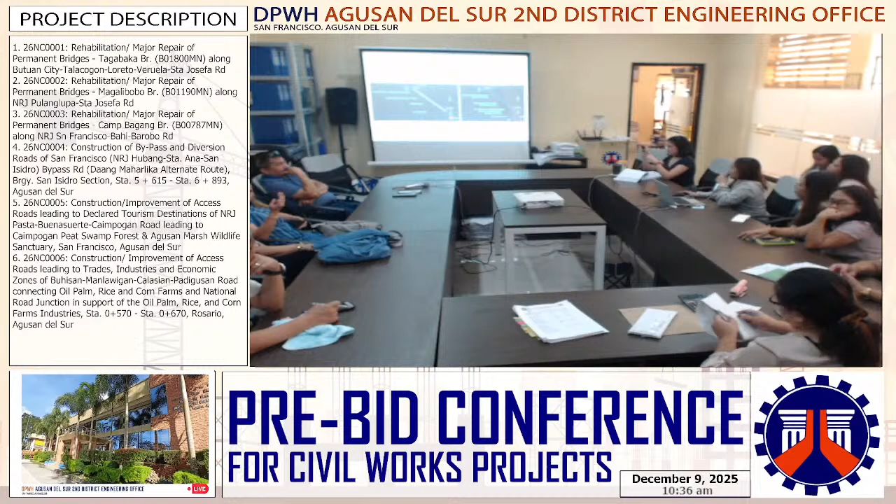So for the bank protection detail, we have here the RC, reinforced concrete, 0.3 meter thick, with lean concrete, 0.10 meter thick with weep holes, and RC footing of 1.8 by 0.5, altitude of 4.5, and for the reinforcing steel bars, 16 mm diameter for the horizontal bars spaced at 0.4, and for vertical bars, 12 mm diameter spaced at 0.4.

And for the RC footing, 10 pieces, 16 mm diameter horizontal bars, and for the stirrups, 12 mm diameter vertical bars spaced at 0.4. Note 50 mm concrete cover. So the dimension of the bank protection is just based on the existing structure on site.

Part of this project is also the installation of transverse expansion joint finger type with quantity of 14.8 linear meters to be installed in between approach slab and deck slab.

So for the program of work, we have here the facilities for the engineers, provision of field office for the engineer, rental basis, bunkhouse 4 months.

For other general requirements, bridge survey and staking 1 lump sum, project billboard 4 each, occupational safety and health 1 lump sum, traffic management based on DEO 13 series of 2018 under layout 3 1 lump sum, mob and demob 1 lump sum.

For the earthwork, we have clearing and grubbing 0.04 hectares, removal of actual structures obstruction 0.3 meter thick PCCP reinforced or the existing approach slabs 80 square meters.

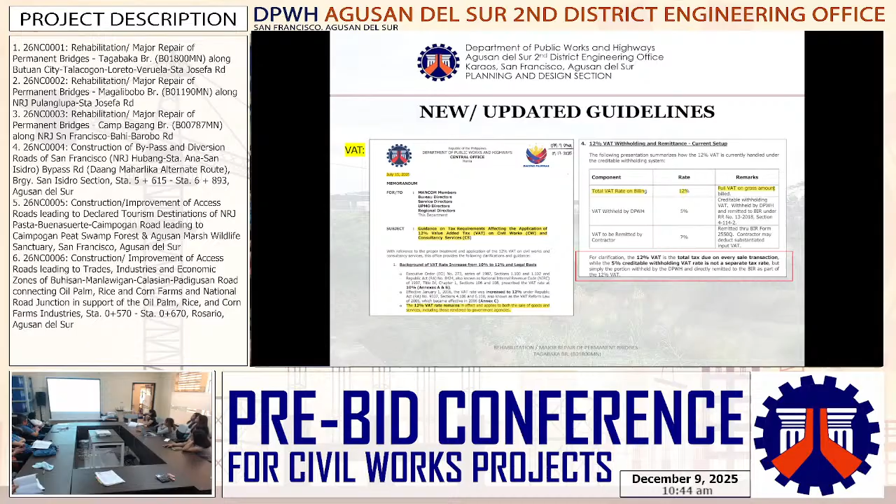Also, for the clarification and the utilization of special issuance of the construction materials price data, or CMPD, through memorandum dated November 24, 2025: first, the prices reflected in the special issuance are exclusive of VAT.

This accords with the Finance Service Memorandum dated July 15, which provides for the proper application of the 12% VAT in the DUPA, the one that I explained a while ago.

Number 2, materials not covered in the special issuance shall be referred to the last approved CMPD, second quarter CY 2025, provided that the VAT is excluded prior to utilization.

So for materials not part of the special issuance, we adopted the prices from the second quarter CY 2025, and we also deducted the 12% VAT to get the original price.

Number 3, specific materials in the CMPD are highlighted in green to indicate the outsource prices, with the corresponding general source locations identified in the footer of each region-wide CMPD.

Meaning for Region 13 again, the asphalt will be from Misamis Oriental, and the RSB and SSB will be from Davao City.

For the updated guidelines on labor, we used the latest labor rates as of June 2025 through memorandum dated July 7, 2025. And also for the updated guidelines on equipment, we use the updated prescribed equipment rental rates through memorandum dated October 13, 2025.

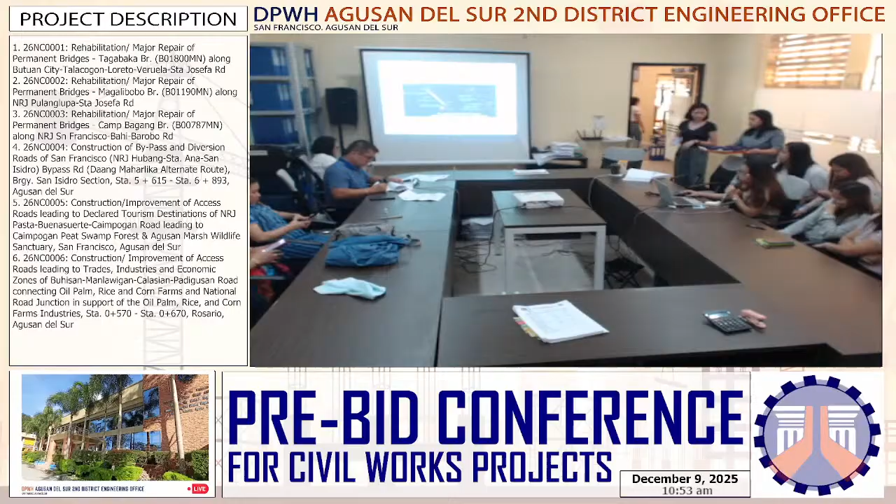The reinforced concrete with dimensions of 0.4 by 1.5 will cover the distance of 22 meters. For the schedule of the bars, we have 12mm diameter vertical bars spaced at 0.4 meters, 16mm diameter horizontal bars spaced at 0.4 meters. For the footing, RC footing, we have 16mm diameter horizontal bars, and for the stirrups, we have 12mm diameter vertical bars spaced at 0.4 meters with 50mm concrete cover.

This only covers the area under the bridge and the downstream side. It covers a total distance of 22 meters. For the reinforced concrete bank protection with pile cap and steel sheet piles, it covers 12 meters.

The pile cap is 0.4 by 0.7 in dimension, and the steel sheet piles are 3 meters in height. The total distance covered is 12 meters. Same with abutment B, the only difference is the sloping: 0.8:1 and 1:1. For the transverse expansion joint, finger type, it will be installed in between the approach slab and the deck slab.

For the program of work, we have the facilities for the engineer: provision of field office for the engineer on rental basis, bunkhouse, 4 months. For the other general requirements: bridge survey and staking, 1 lump sum; project billboard signboard, 4 each; occupational safety and health program, 1 lump sum; traffic management based on DEO 13 series of 2018 layout 3, 1 lump sum. For mobilization and demobilization, 1 lump sum.

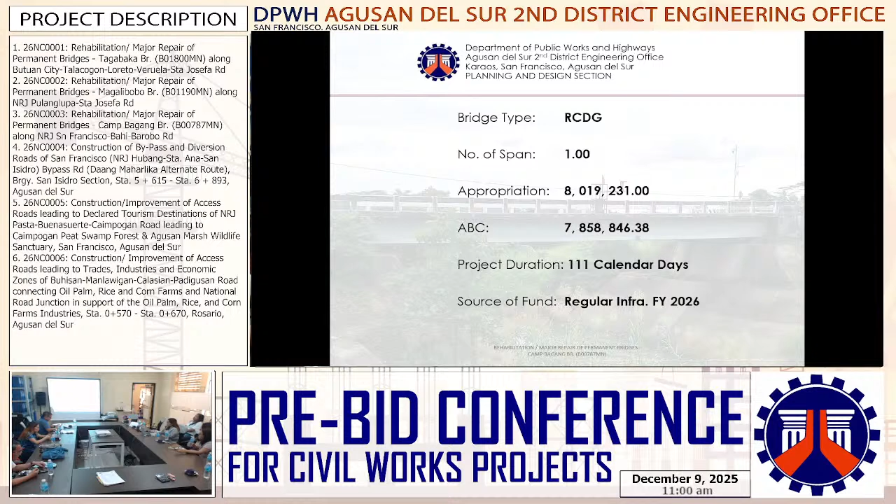For the bridge profile of Camp Bagang Bridge, it was constructed in year 1981, and for the history, it was repaired and rehabilitated in year 2014 under maintenance section funds. We also have the widening at both sides, which is still ongoing under FY 2025.

For the existing inner lane RCDG, years in service 44 years. For the location map, this is the Camp Bagang Bridge. This way is going to Barobo, and this way is going to SF Rotonda. By the way, this is the SF Rotonda.

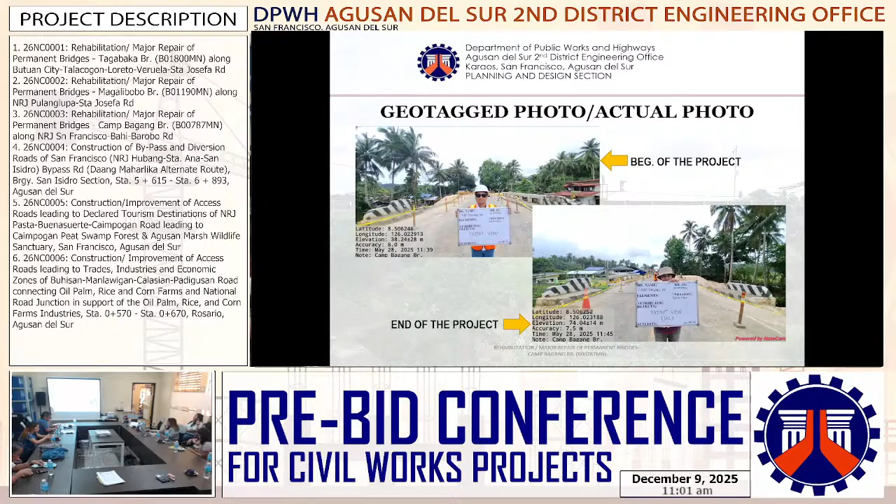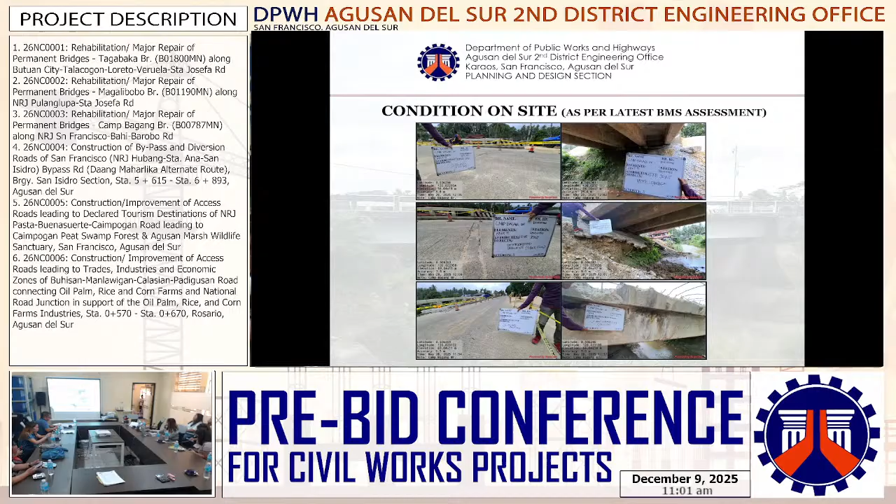For the geotagged photo or actual photos on site, this is the beginning of the project and the end of the project. For the condition on site, as per latest BMS assessment, it was observed that there's scaling at the approach slabs, water leakage at expansion joint, deteriorated sealant, damaged bank protection under inner lanes, then scaling at the deck slab, and bar exposure at G1 or girder 1.

For the general plan, we have here the RC bank protection under inner lanes or 2 lanes with lean concrete 0.10 meter thick, RC footing of 0.4 by 1.5, distance covered of 8.5 per abutment. This is just the gap in between our widening of both sides.

We also have the removal and replacement of approach slabs A and B, then removal and replacement of the whole span of our deck slab. Then we also have the installation of expansion joint finger type at A and B.

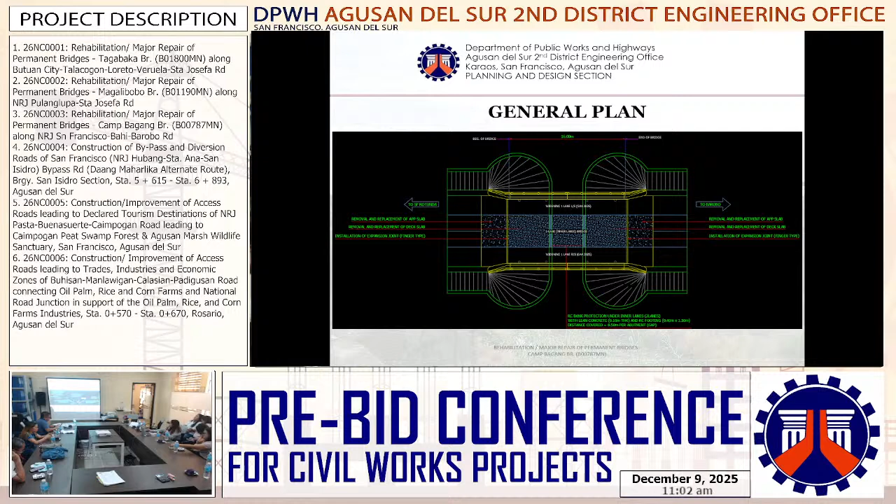For the general elevation, note that the post, railings, and sidewalks of the existing 2 lanes or the inner lanes were already removed as part of the FY 2025 widening of the bridge both sides. So as part of this project, we have the removal and replacement of deck slab for the 2 inner lanes.

Then we also have the application of carbon fiber at G1 or girder 1 near abutment B. We also have the installation of expansion joint finger type at abutment A and B, removal and replacement of approach slabs A and B, and also the RC bank protection under inner lanes, 0.3 meter thick with lean concrete 0.10 meter thick, and RC footing of 0.4 by 1.5, distance covered of 8.5 per abutment.

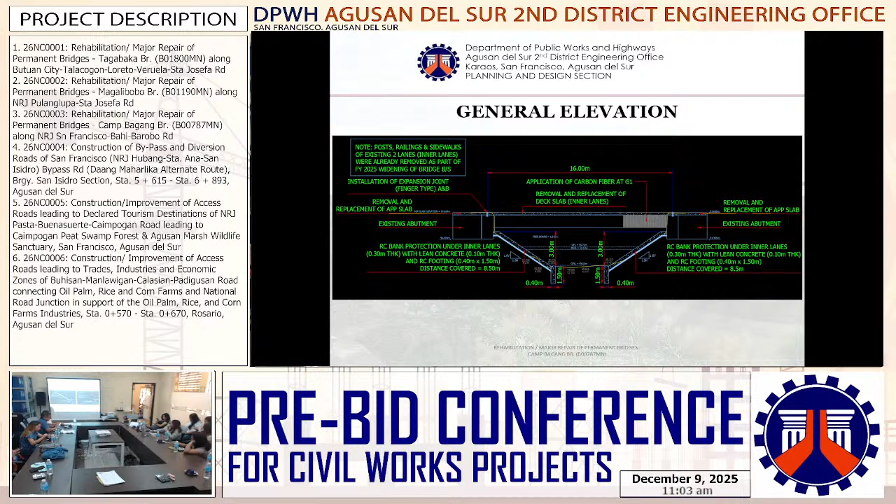So for the bank protection details, we have the RC bank protection 0.3 meter thick with lean concrete 0.10 meter thick with weepholes, RC footing of 1.5 by 0.4.

For the RSB details, we have 16mm diameter horizontal bars spaced at 0.4 meter, and vertical bars 12mm diameter spaced at 0.4 also. For the RC footing, we have 10 pieces of 16mm diameter horizontal bars, and for the vertical bars, 12mm diameter. Note 50mm concrete cover.

Also, please be reminded that the dimension of the bank protection is just based on the existing structure on site.

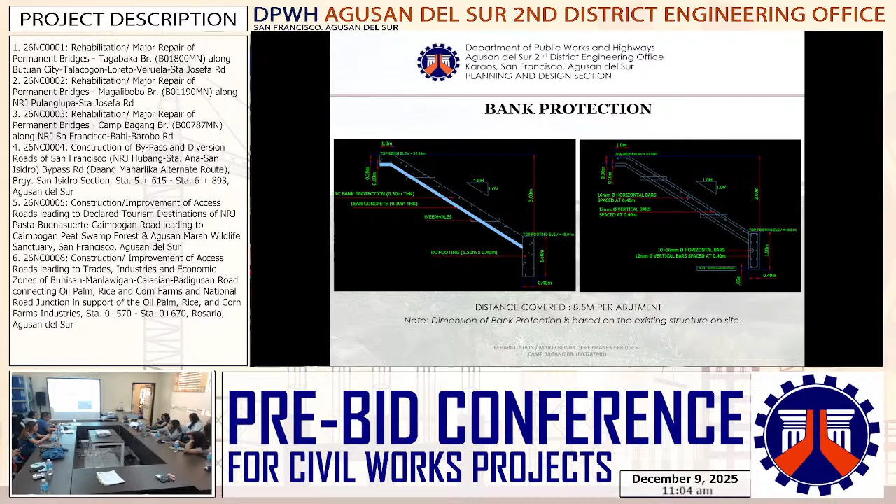We also have the transverse expansion joint, finger type, with a quantity of 14.8 linear meters. We also have the application of carbon fiber at G1, length of 2 meters, 1 layer carbon fiber sheet G1, 1.2mm thick.

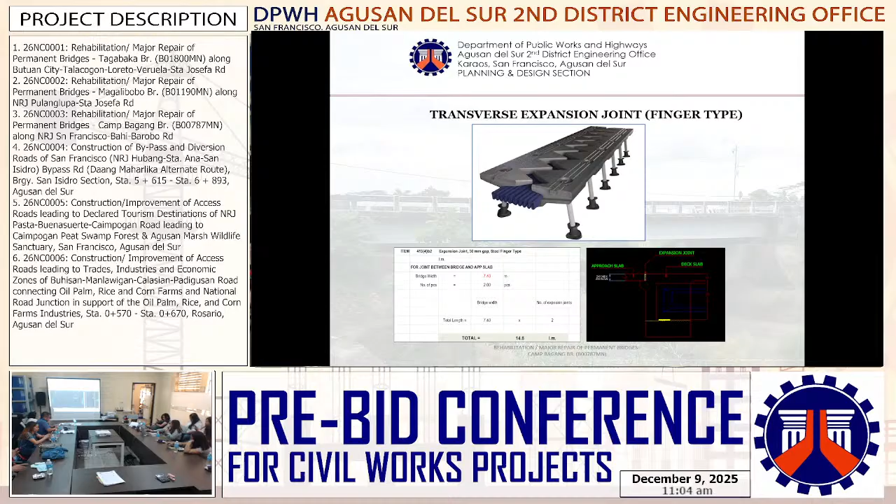So for the program of work, we have the facilities for the engineers: provision of field office for the engineer, rental basis, bunkhouse, 4 months.

Other general requirements: bridge survey and staking, 1 lump sum; project billboard, 4 each; occupational safety and health program, 1 lump sum; traffic management layout 6 of DEO 13 series of 2018, 1 lump sum; mobilization and demobilization, 1 lump sum.

For the earthwork, we have clearing and grubbing, 0.031 hectares; removal of actual structures obstruction, 0.3 meter thick PCCP reinforced, or our existing approach slabs, 80 square meters.

For the removal of structures and obstruction concrete, this is our damaged bank protection and the deck slab, 36.43 cubic meters. For the embankment from borrow, common soil, this is under the inner lanes for our bank protection, we have 21.27 cubic meters.

For the sub-base and base course, we have aggregate sub-base course under approach slabs, 16 cubic meters. For our approach slabs, we have 80 square meters.

For the bridge construction, for the reinforcing steel grade 40, this is for the deck slab and RC footing, 448.077 kilograms. And for the reinforcing steel grade 60, 13,899.54 kilograms.

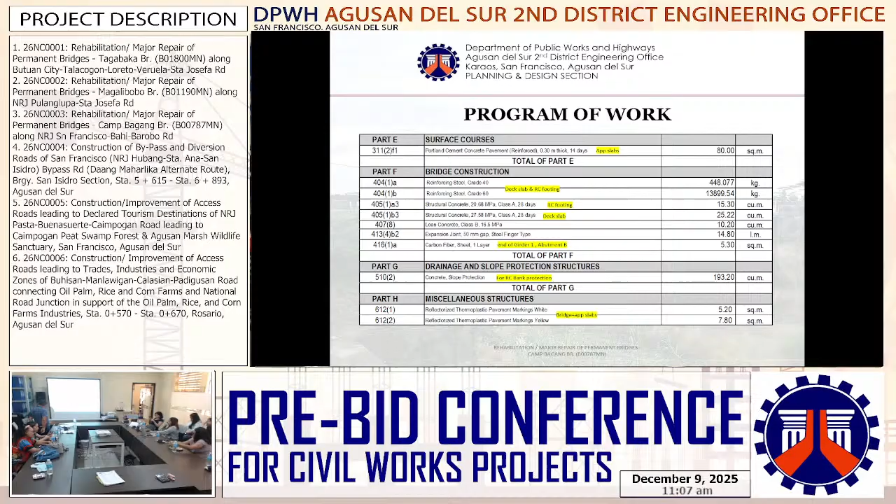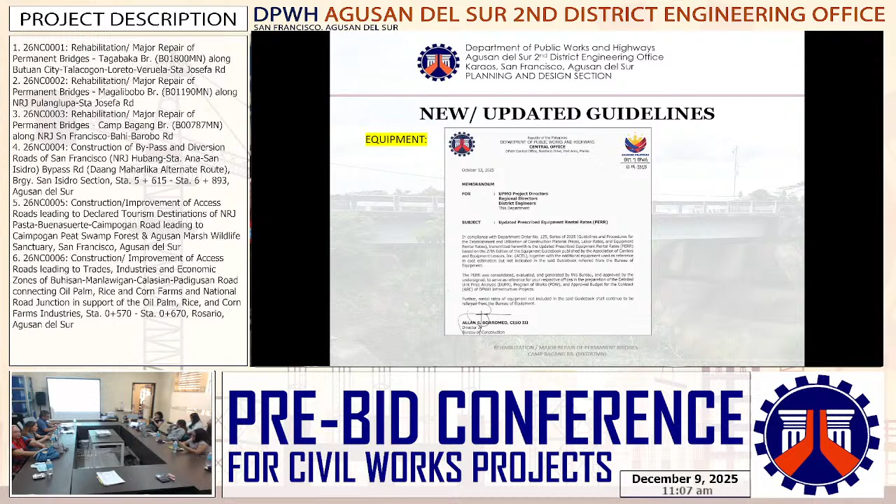For the quarry sources for Camp Bagang Bridge, we have the cement. This will be from DPWH ADS 2, 7 kilometers away from the project site. Our RSB will be from Davao City, with 211 kilometers hauling distance to the project site.

Note for the sand and gravel, crushed, delivered, no further hauling cost shall be programmed. Identification of quarry sites for sand and gravel must be coordinated with the assigned ME and in accordance with the approved DPWH ADS 2 DEO materials quarry map.

For the minimum equipment requirement for Camp Bagang Bridge, we have bulldozer 1, dump truck 2 units, payloader, backhoe with breaker, boom truck, jack hammer, vibratory roller, water truck.

1 unit, and for the transit mixer, 2 units; concrete vibrator, concrete screeder, cargo service truck, 1 bagger mixer, welding machine, grout mixer, plate compactor, kneading machine, applicator machine, all 1 unit.

That's all, sir, for Camp Bagang Bridge.

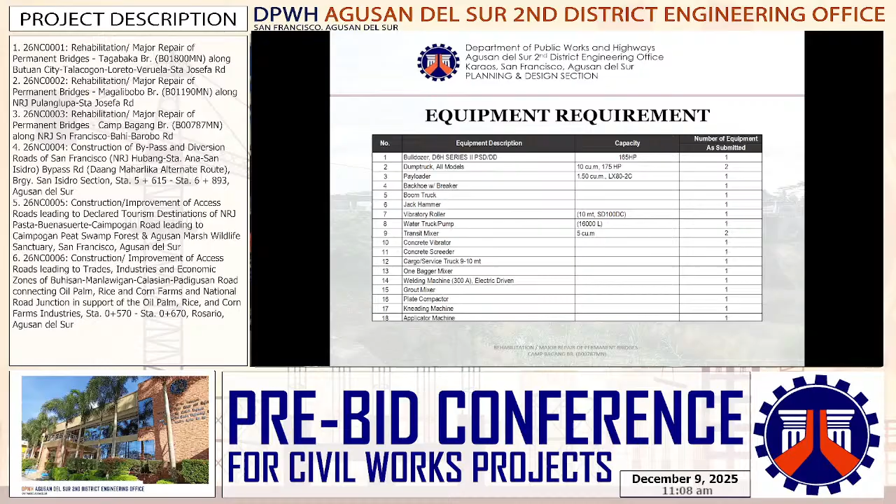26 NC 0004 by Martin.

Construction of bypass and diversion road of San Francisco, NRJ Hubang, Santa Ana, San Isidro Bypass Road, Daang Maharlika Alternate Route, Barangay San Isidro Section, Station 5+615 to Station 6+893, Agusan del Sur.

In the project limit, Station 5+673 to Station 6+893 includes the road widening and slope protection construction, and for Station 5+615 to 6+893 is the construction of drainage. Target length of 1,278 meters or 2.556 lane km, located at San Francisco.

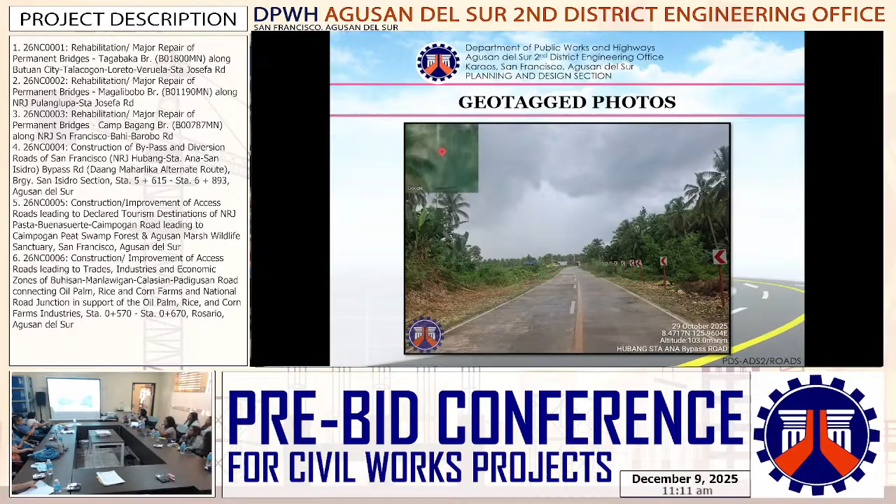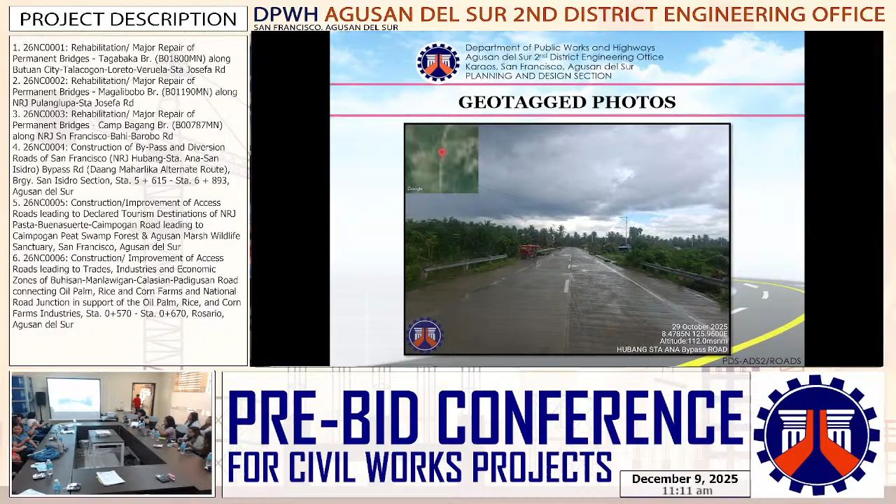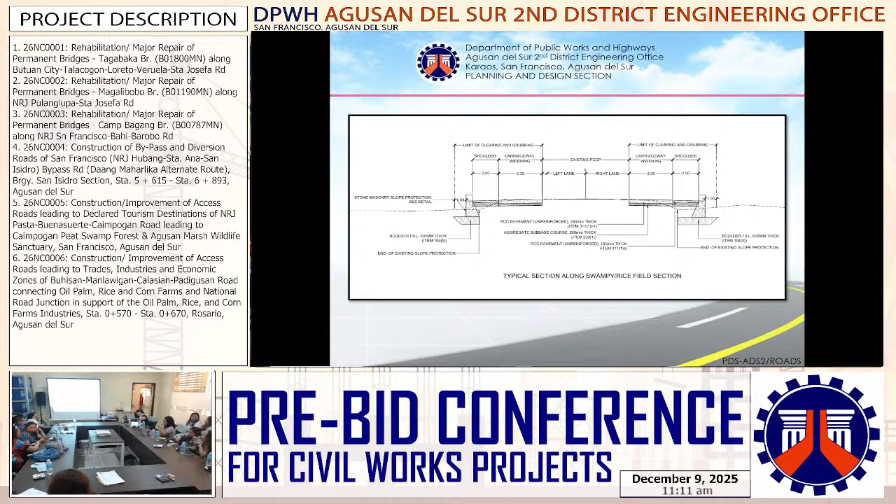The base is 0.7 of the height and embedded 0.6 into the existing ground. The dimensions for the railings are 1.6 by 0.6 by 0.5 with spacing of 200 mm.

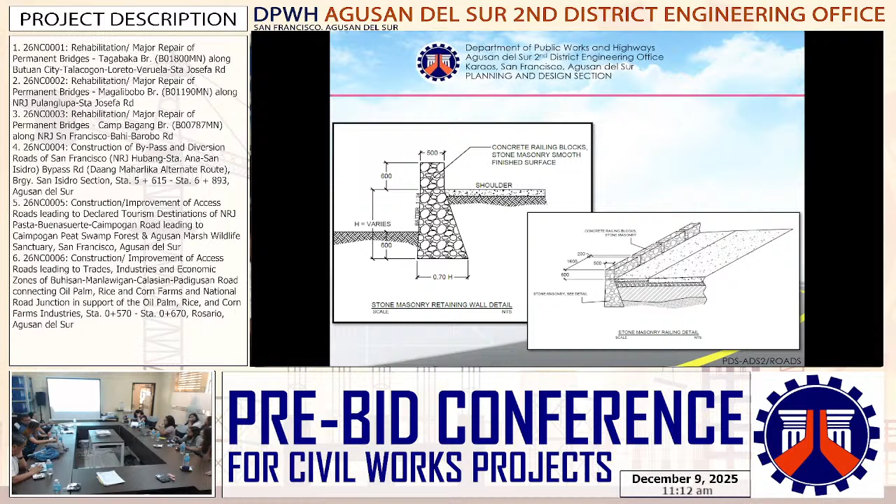For the canal section, the reinforcement is 10 mm diameter for the vertical and horizontal, 0.6 by 0.7 dimension, and 150 mm thick concrete.

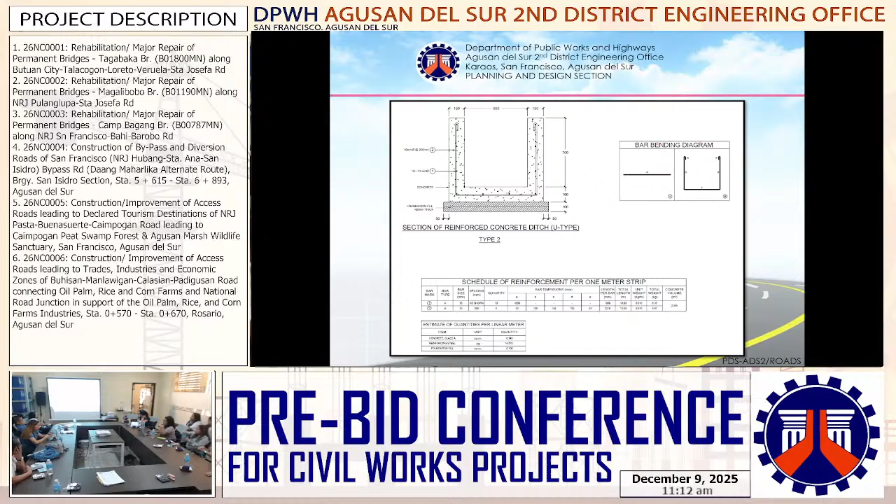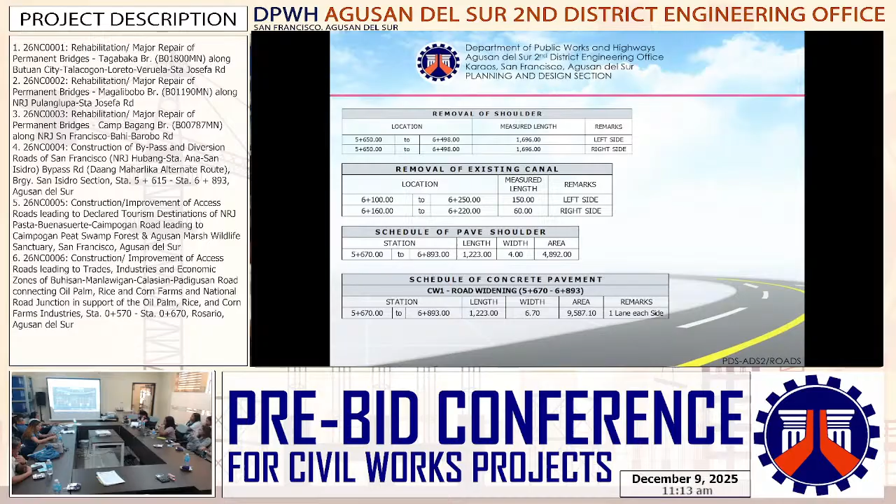Included in the construction is the removal of existing shoulder, removal of paved shoulder, removal of existing canal, and schedule of paved shoulder, and schedule of concrete pavement for widening. This is the plan and profile, or the cross section.

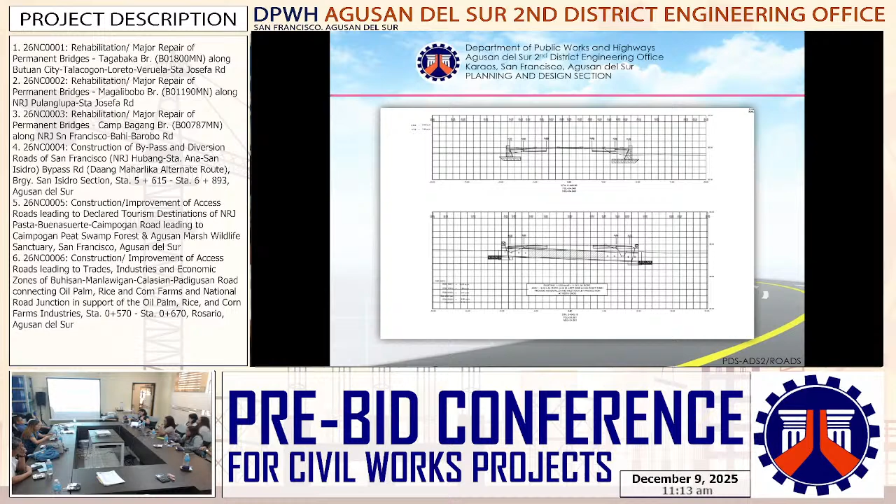For the program of works, for CW1 road widening: facilities for the engineer, provision of field office for the engineer, rental basis 8 months. Other general requirements: construction survey and staking 1.223 km, project billboard or signboard 4 each, occupational safety and health 1 lump sum, traffic management 1 lump sum, mobilization and demobilization 1 lump sum.

For earthworks: clearing and grubbing 2.03 hectares, removal of actual structures or obstruction 0.15 meters thick, 3,392 square meters, removal of structures and obstruction concrete.

This is for the existing canal and for the chipping of existing slope protection, 341.53 cubic meters. Removal of existing guardrails 1,300 linear meters, removal of existing...

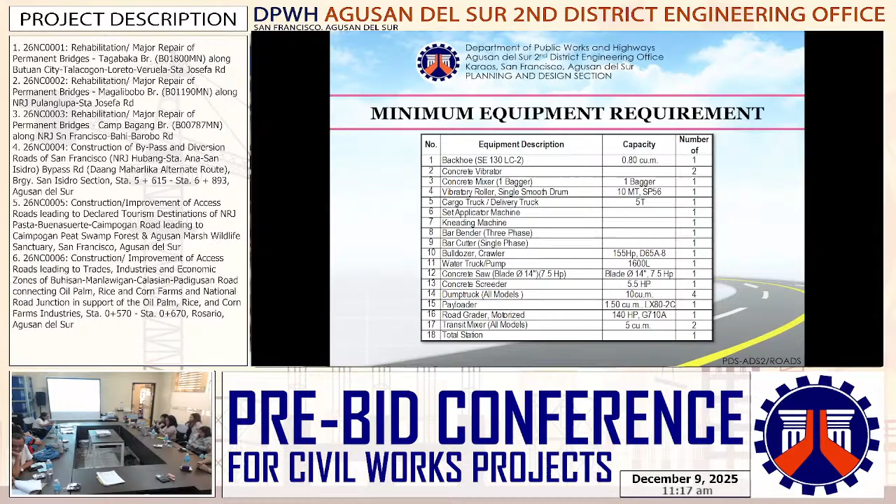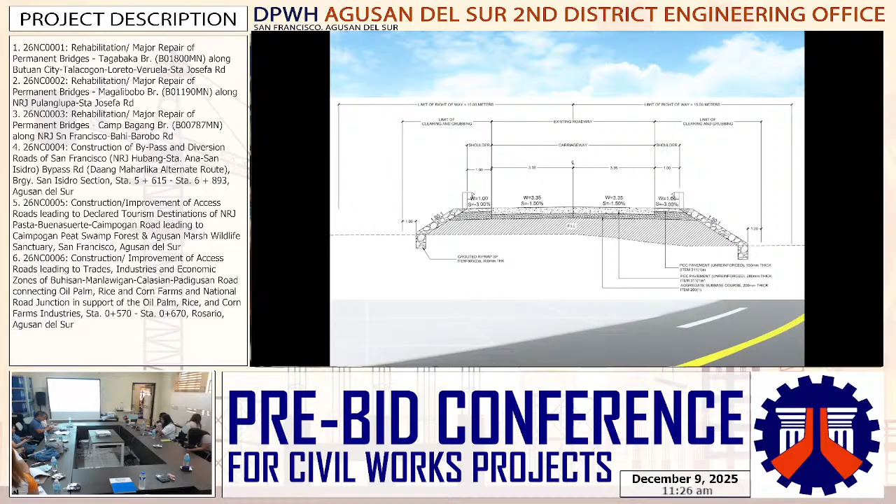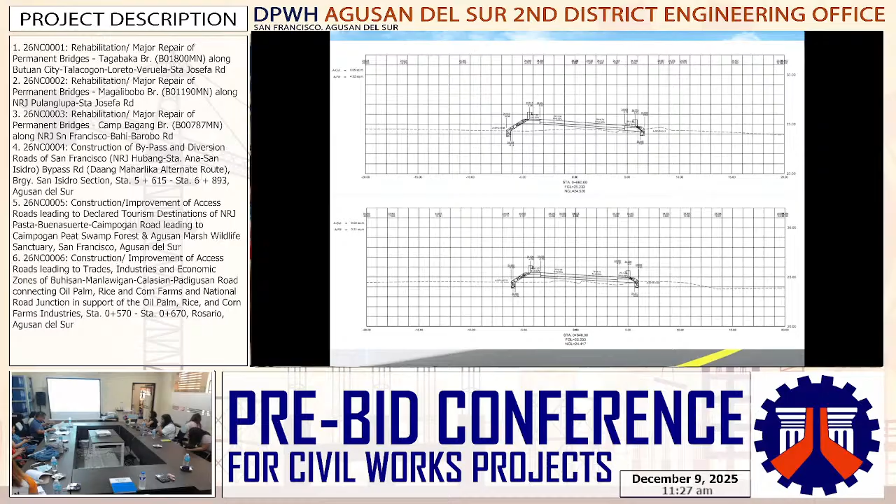Furniture or fixtures, equipment, and appliances for the field office for the engineer, 1 lump sum. This includes a multifunction inkjet printer A3, 1 unit.

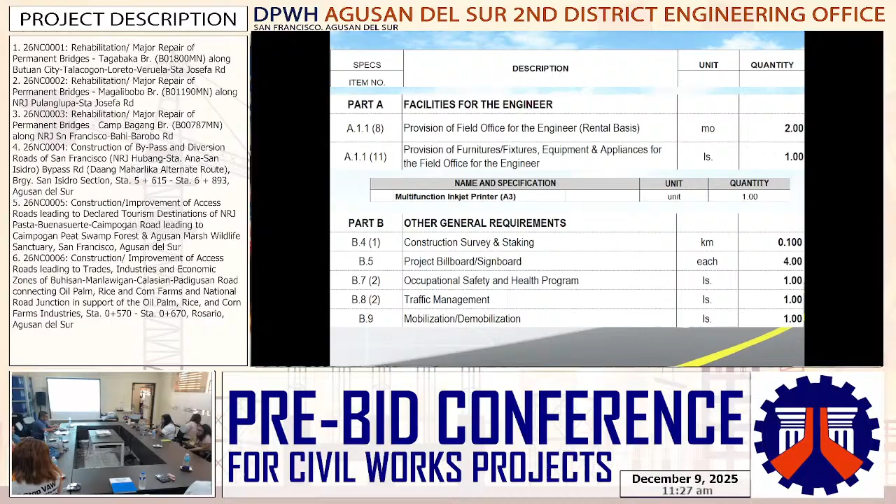For other general requirements: construction survey and staking 0.100 kilometers, project billboard or signboard 4 each, occupational safety and health program 1 lump sum, traffic management 1 lump sum, mobilization or demobilization 1 lump sum.

For earthworks: clearing and grubbing 0.15 hectares, individual removal of trees 150 to 300 millimeter diameter, 17 each, foundation fill 13.50 cubic meters, embankment from roadway or structure excavation common soil 66.08 cubic meters, embankment from borrow or common soil...

195.67 cubic meters. And for subgrade preparation common material, 1,093.10 square meters. For subbase and base course, aggregate subbase course...

271.67 cubic meters. For surface course, PCCP unreinforced 0.15 meter thick, 14 days, 200 square meters. For PCCP unreinforced 0.28 meter thick...

728.34 square meters. For drainage and slope protection structures: reinforcing steel grade 40, 4,596.47 kilograms. Structural concrete 20.68 megapascal class A, 28 days, 49.65 cubic meters.

Lean concrete 6.75 cubic meters. And for grouted riprap class A, 39 cubic meters.

For miscellaneous structures: metal guardrails including post with W-beam 60 linear meters, metal beam end piece fishtail for each, hazard markers, chevron signs 9 each, reflectorized thermoplastic pigment markings white and yellow, 25.40 square meters and 3.37 square meters respectively.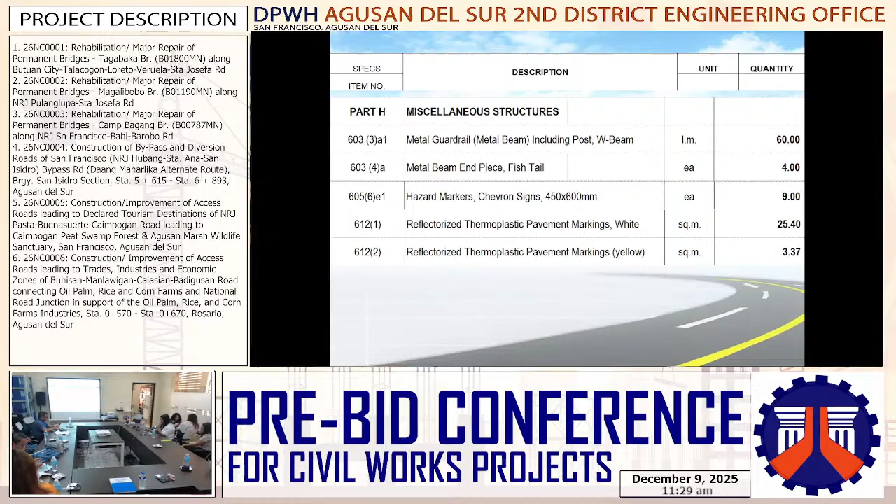For the minimum equipment requirements: dump truck, transit mixer, concrete vibrator 2 units, payloader, backhoe, motorized road grader, vibratory roller, water truck, bulldozer, cargo truck, concrete screeder, concrete saw, bar cutter, total station, concrete mixer, plate compactor, thermoplastic applicator machine, kneading machine, chainsaw, joint sealer, and bar bender, all 1 unit.